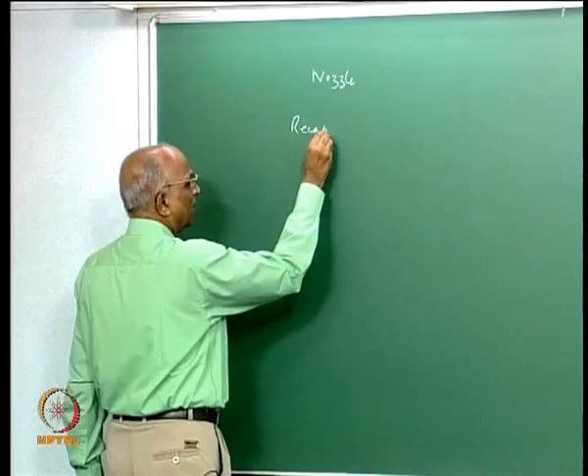Well, good morning. We will continue with the portion on nozzle. What we do today is we will find out what is the effect of area ratio. We will define area ratio. We will also find out how the nozzle operates at different altitudes and look at some typical results. But before doing that, let us quickly recap where we were so that we can connect it with what we are going to do today.

All what we told in the last class was a nozzle, if we need to have a high jet velocity, needs to have a convergent, maybe it should have a throat for which Mach number is equal to 1, and then I should have a divergent. We were very clear about the throat. We said it is the place where the velocity is sonic, that means the throat velocity is the sonic velocity, maybe Vt is equal to at.

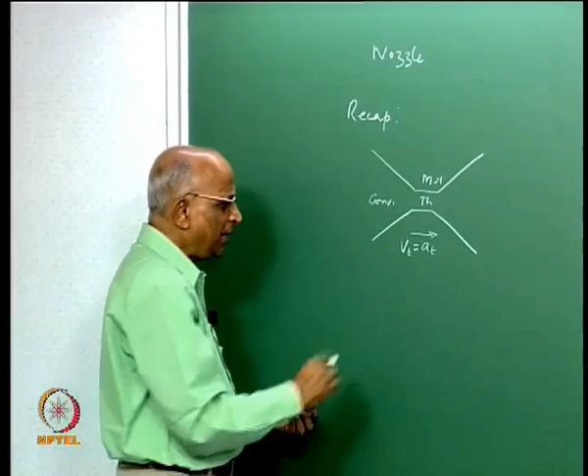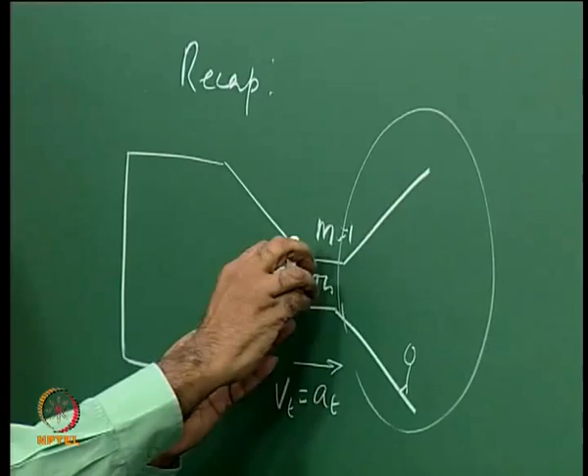We also told ourselves any disturbance here, suppose I stand on the nozzle here and make a loud noise, or I do any disturbance, this disturbance cannot enter the convergent and therefore the chamber over here. The reason being the velocity here is equal to the velocity of sound in the throat and is greater than the sound velocity in the divergent, and any disturbance which generates downstream cannot travel here because the speed here itself is sonic, and therefore we told ourselves any disturbance downstream of the throat cannot enter the chamber, and therefore the sonic throat essentially decouples the convergent and the chamber from the downstream portion. This is because the disturbances travel at the sound speed.

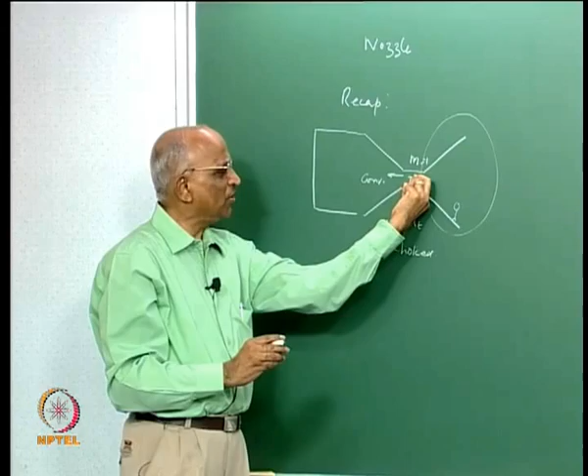Second thing, we also told that the throat is choked. In other words, we told ourselves that for the given mass flow rate I can have a maximum velocity which corresponds to sound speed at the throat, and if I have higher pressure or if I suck it at a lower pressure, I cannot exceed this condition. That means the throat always will have Mach number equal to 1, or the velocity here should be the sound speed. I think these definitions are important.

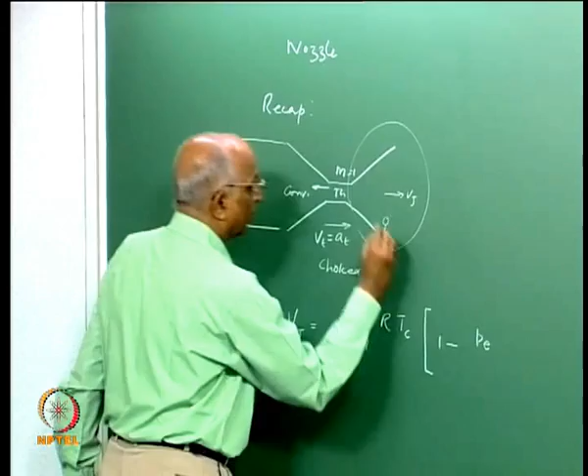We also derived an expression for the jet velocity at the exit, which we derived as Vj equal to the square root of 2 gamma divided by gamma minus 1. We will write in terms of the specific gas constant R into the temperature within this chamber into, we had something like the expansion, 1 minus the exit pressure, that is the pressure at the exit over here, divided by the chamber pressure here, Pe by Pc to the power gamma minus 1 by gamma, and this was under root.

And this we did not even consider the convergent divergent shape. We just said that if the chamber pressure is Pc, if the exit pressure is Pe, then you have the pressure ratio coming, this is the temperature in the chamber, and this is how we derived the expression for Vj, which was so many meters per second. Is it all right?

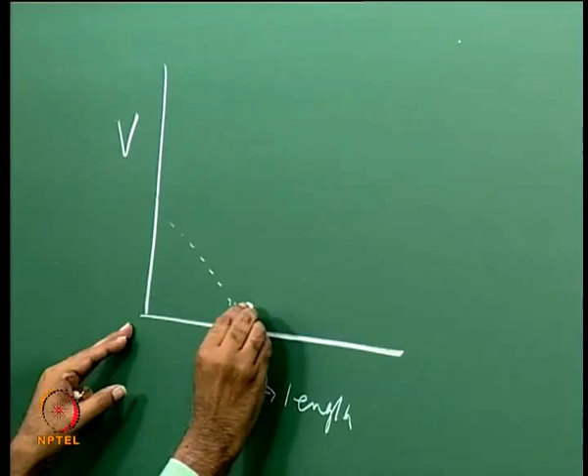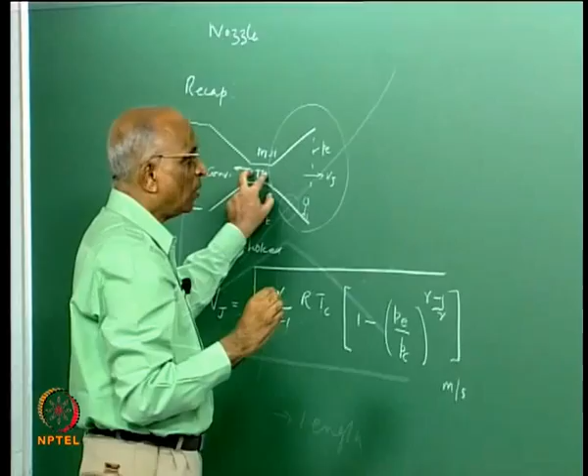And what we started with a vent, we derived this velocity, and then to look at the shape of the vent, it was necessary for us to have a convergent followed by the divergent, such that if I were to now plot the velocity of the gases as a function of the length of the nozzle, mind you, along the length of the nozzle initially I have a converging shape, then I have a throat, then I have the diverging shape. This is where I get the sonic velocity, and therefore the velocity will keep increasing along the nozzle. The moment I have at the throat the velocity less than sonic, the velocity builds up and thereafter the velocity falls. Therefore, the necessity to have Mach number 1 at the throat was essential, right? I think this we must remember all the time.

Having said that, now in today's class we will try to see, instead of mentioning that the exit pressure is Pe, after all I have to realize a nozzle. Can I put it in terms of a number? Let us say the area ratio at the exit will be Ae, and therefore what must be the area ratio Ae such that the nozzle will give me the required velocity. And that is what I want to do today.

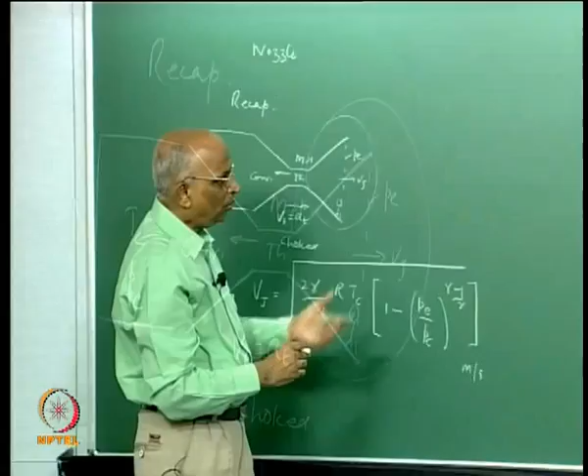Let me repeat again. See, when I realize a hardware, I do not know the value of Pe. All what I know is I must have a configuration like this, I must know a diameter over here, I must also have the diameter at the exit, or rather the exit area ratio. Therefore, it becomes essential for me to define something like area ratio of a nozzle.

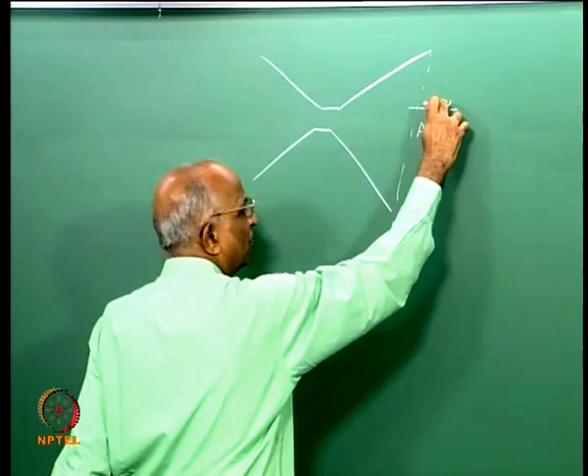To be able to give me the value of PE such that I can get the jet velocity, or rather, I want to know the configuration. Let us put it this way. I have a convergent, I have the throat, I have the divergent. I want to know what will be my exit area such that I can get the Vj whatever I want. I want to find out the expression for the jet velocity in terms of a diameter or an area ratio rather than put it in terms of the value of the pressure at the exit, which we called as PE.

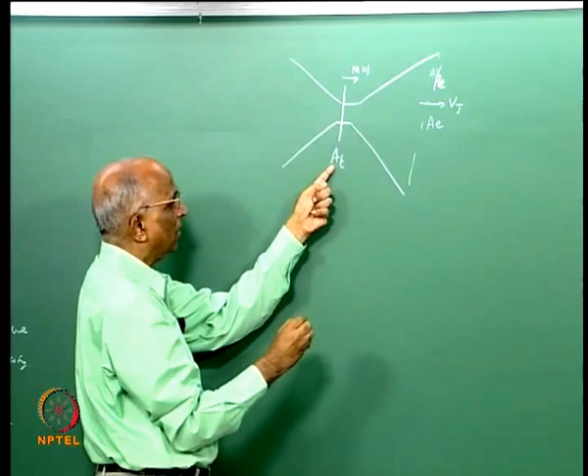To be able to do that, I am looking at the exit area, and I would like to define the area at the throat, because I know that at the throat the Mach number is always equal to 1. Therefore, I can define it as a critical or a particular area for reference, and I call the nozzle area ratio as equal to the exit area divided by the area at the throat.

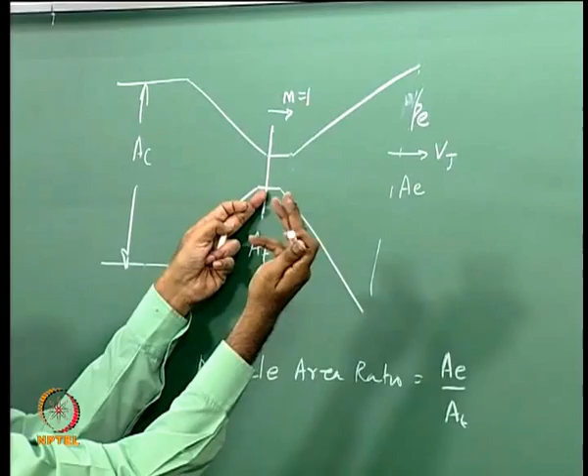This is by definition. In fact, initially all of us tend to think, if I have to define something like an area ratio, maybe I should think in terms of the area of the chamber over here and relate it to the area at the exit. But whatever be the area here, the reference is the throat, because that is where the velocity is always equal to the sound speed, or Mach number is 1. Therefore, we define the nozzle area ratio as the exit area divided by the throat area, and it is denoted by epsilon, and epsilon is equal to AE by AT. Is it okay?

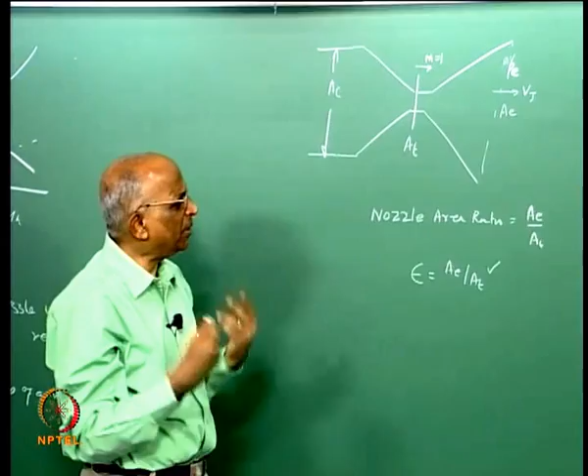Having said that area ratio is AE by AT, I want to derive an expression for how the area ratio will affect the jet velocity, or how the performance of a nozzle would be linked to the exit area ratio. Let me repeat the problem such that it becomes a little more clear. Supposing I have a small rocket, let us say, I bring it to the throat Mach number 1, I could have a small area ratio, or I could also have the same rocket in which, now I again draw this one over here, I could have a very large area ratio.

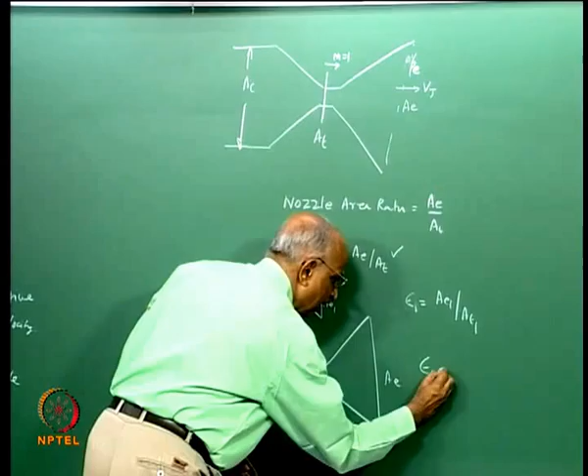And how do I compare the performance of an area ratio which is AE1 with area ratio AE2, if the throat area is the same in the two cases? In the first case, I have area ratio 1 equal to AE1 by AT1. In the second case, I have area ratio 2 equal to AE2 by AT2. I want to compare which one gives me a higher velocity. I want to compare these two nozzles, and therefore we define area ratio as exit area divided by the throat area. The reason being, I could have had a much larger chamber, but still even for a larger chamber the throat area would be the same for a given condition.

I think we must keep this in mind. Area ratio is always defined with respect to the throat, that is exit area divided by the throat area. I want to determine it. Let us go ahead and try to write an expression. Therefore, I am interested in finding the value of AE by AT for a nozzle. And how do I do it?

I just look at the continuity. I look at the mass which is coming over here, mass which is passing through the throat, mass which is passing through the exit, and I write m dot is equal to the mass which is passing through the throat, rho t into the velocity at the throat times the area at the throat, is equal to the area at the exit, rho at the exit, V at the exit. Is it all right? If anybody has a question, please, I think this is the time to take it up.

Therefore, we find that I need the condition at the throat, namely the rho t at the throat I need to be able to find out. I also need rho e. I know V, V is nothing but the velocity with which it is exiting. This will be equal to the Vj, which I have already derived. Therefore, I need to find the conditions at the throat. Therefore, let us first spend a couple of minutes on deriving the expression for the conditions at the throat, which are so critical to a nozzle. Let me again repeat, the condition at the throat will specify the mass flow rate because it is choked over here. I will come back to this later, but let us first find out what are the density, pressure and temperature at the throat.

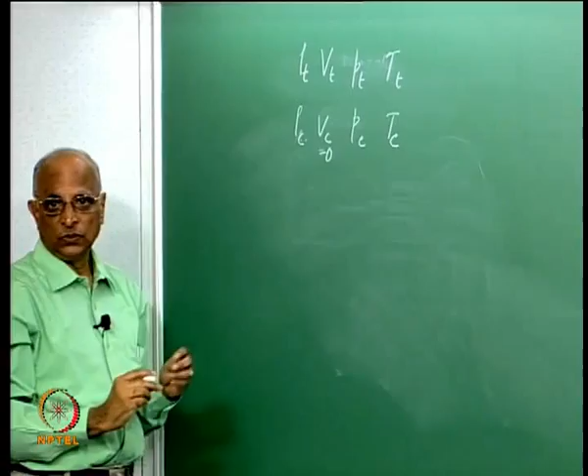We say the throat is defined by density at the throat rho t, Vt, pressure at the throat Pt, temperature at the throat Tt. That means subscript T denotes the throat condition. And how did we define the chamber conditions? Rho c, with capital C over here, velocity in the chamber which we said was equal to 0, pressure in the chamber, temperature in the chamber. At the exit, rho exit, V exit which is equal to the jet velocity at the exit, P at the exit, T at the exit. Well, these are the variables that we have.

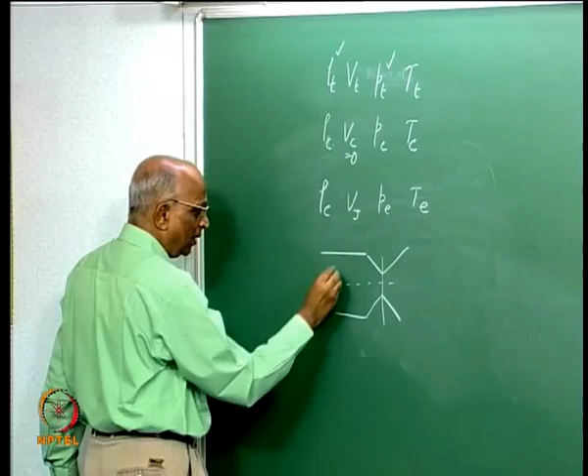I want us to find out the value of rho t as a function of rho c, Pt as a function of Pc, and Tt as a function of Tc. Therefore, we again look at the conditions; we are deriving the same expression, and we are interested in the condition at the throat over here. The conditions are given by subscript T for rho, V, T and all that. This is the chamber condition. We treat this as a control volume, or rather our attention is only in this small region which I show hatched over here.

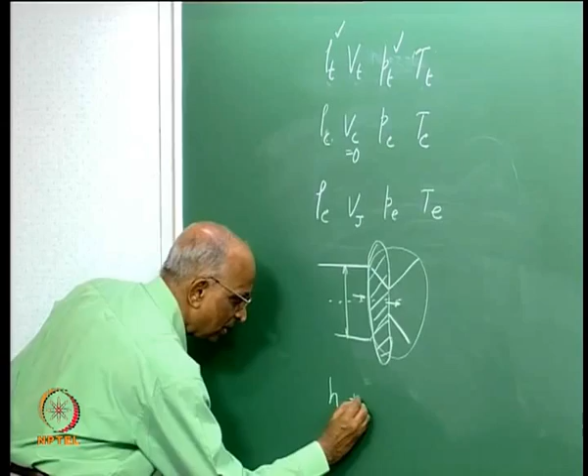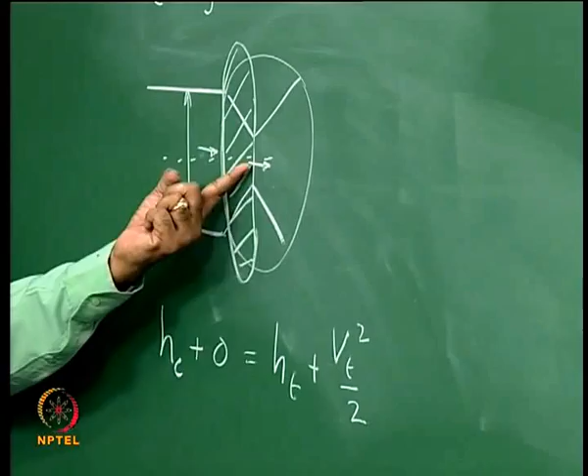Gas enters at a pressure Pc at velocity 0 at a temperature Tc. At the throat it leaves at a condition rho t at a velocity equal to the sound velocity because it is choked, at a pressure Pt and at a temperature Tt. So, let us write the expression for this control volume. Let us again assume adiabatic condition, and therefore we can write the enthalpy entering Hc plus kinetic energy 0 is equal to H at the throat plus Vt squared divided by 2. This is a steady flow energy equation, same mass flow; the initial kinetic energy is 0, at the throat the enthalpy is Ht, Vt is the velocity at the throat, and the kinetic energy at the throat is Vt squared by 2.

Okay. Now, let us simplify this equation. We get from this equation Vt squared divided by 2 is equal to Hc minus Ht, and the difference in enthalpy is equal to Cp times Tc minus Tt. Therefore, Tc minus Tt is equal to Vt squared divided by 2 Cp. Now, if there is anything, please let me know. What is the value of Cp in terms of gamma? Vt squared divided by 2 times gamma divided by gamma minus 1 into R.

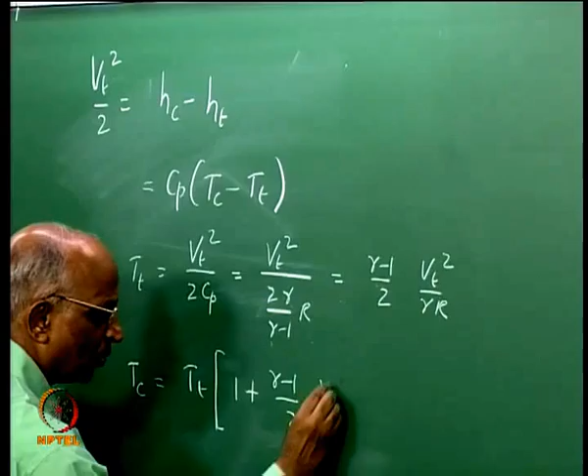How did this come? We have derived it in the earlier class. Cp minus Cv is R, Cp by Cv is gamma, and therefore Cp is equal to gamma by gamma minus 1 into R. Therefore, I can write this expression as gamma minus 1 divided by 2 into Vt squared divided by gamma R. And therefore, I can now write, taking Tt to the other side, Tc is equal to Tt into 1 plus gamma minus 1 divided by 2 into Vt squared divided by gamma R Tt. What did I do? I have taken Tt to the bottom, and therefore I have gamma minus 1 over 2 times Vt squared by gamma R Tt. Is there some 2 missing? No, it is all right.

And now I know gamma R Tt is the sound speed at the throat. Vt is also equal to the sound speed at the throat. Therefore, this is the Mach number squared, and I get 1 plus gamma minus 1 by 2 into Mach number squared. Mach number is 1, and therefore this gives me the temperature at the throat as a function of the chamber temperature. Tt by Tc is equal to 2 divided by gamma plus 1, taking it to the other side.

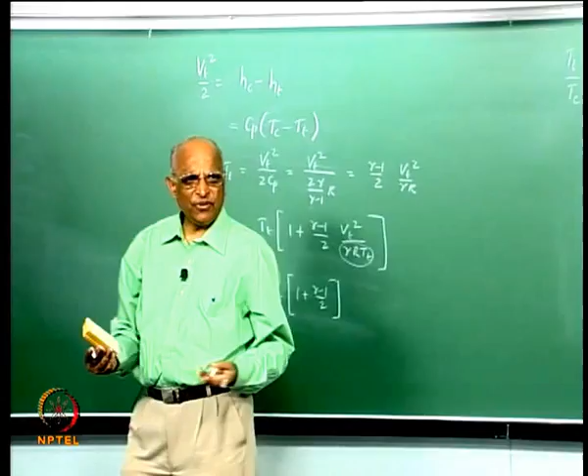Now, what will be the value of Pt by Pc? We have derived the expression in the last but one class. What did we say? It is equal to Tt by Tc to the power gamma by gamma minus 1.

Please look back, let's check it. And how did we get this? We had P by rho to the power gamma is a constant, P by rho T is a constant. Solving for this, we got this particular expression.

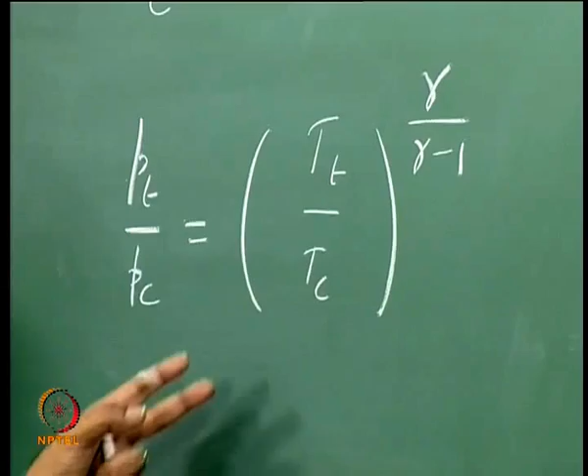In fact, you will remember in the expression for Vj, we had the expression 1 minus P by Pc to the power gamma minus 1 by gamma. How did it come? This was essentially Te by Tc, and when we converted it in terms of the pressure ratio. What is the value of rho T by rho C? 1 over gamma, that is equal to 2 over gamma plus 1 to the power 1 over gamma minus 1, and this maybe I should have written here as 2 over gamma plus 1 to the power gamma divided by gamma minus 1.

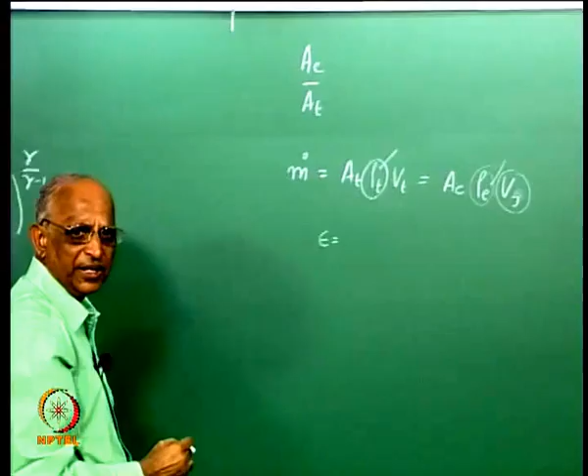What is it we have derived? We derived the conditions at the throat, namely the value of the temperature, pressure and density at the throat as a function of the conditions in the chamber, which is what we are given. I want us to go back and apply these three relations over here. We know the density at the throat, maybe I have to find out the density at the exit and find out the value of the exit area ratio as a function of the exit pressure, or exit pressure as a function of area ratio I am interested in.

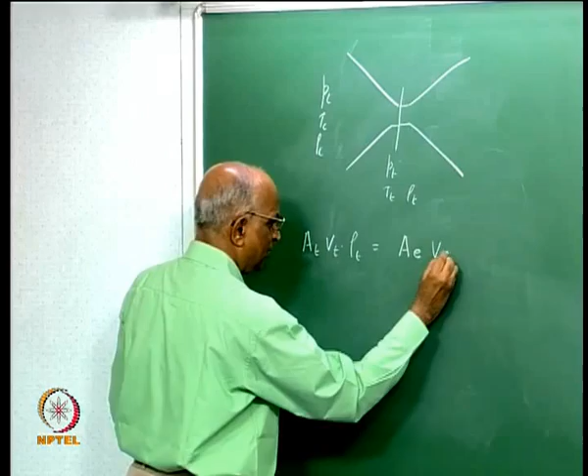Therefore, I hope by now we know how to evaluate the conditions at the throat of a nozzle. All we have learned so far is, if I have a throat coming from a chamber pressure Pc, temperature Tc, density rho c, I know how to find out the conditions of Pt, Tt and rho t. Agreed? Now, let us go back and solve that equation, namely area at the throat, velocity at the throat into the density at the throat is equal to area at the exit, velocity at the exit, rho at the exit, or rather from this I get the area ratio AE by AT is equal to Vt into rho t divided by Ve into rho e. Is it all right?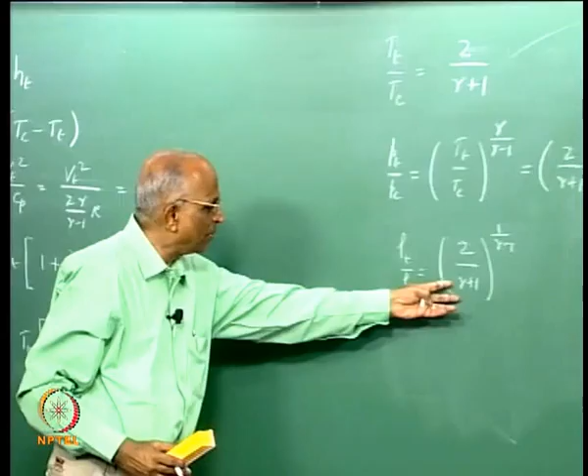I want to substitute the values. I know the value of rho t in terms of rho c, therefore I say this is equal to 2 over gamma plus 1 to the power 1 over gamma minus 1. I take this particular expression, rho t by rho c is equal to 2 over gamma plus 1 to the power 1 over gamma minus 1, and then I now have rho t into rho c into Vt, I still keep it as Vt, and now I know that Ve is equal to Vj. What is the value of Vj? Under root 2 gamma RTc over gamma minus 1 into 1 minus Pe by Pc to the power gamma minus 1 by gamma, into the value of rho e.

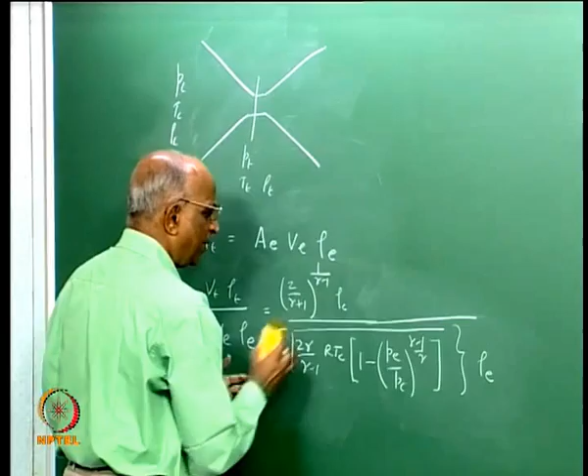Okay. Now I want to somehow get rid of rho e, also Vt. Vt I can write in terms of the sound speed, and this is equal to at, and therefore here I can write it as equal to under root gamma R temperature at the throat. Let's be very careful, because these are all simple algebraic expressions. We are substituting one into the other, and in the process we are also learning how the properties are varying. Let's solve that equation further.

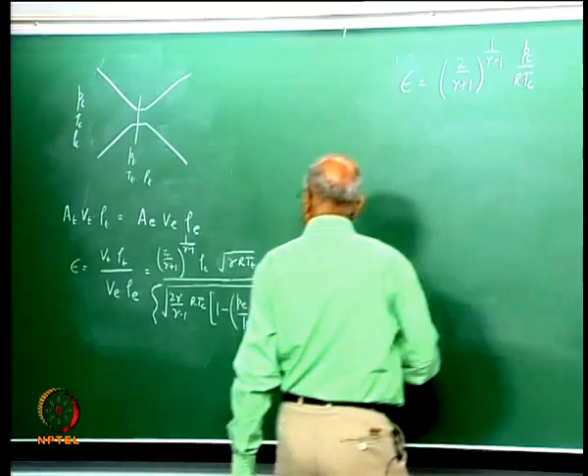Therefore, the area ratio epsilon is given by, let's write it down, 2 over gamma plus 1 to the power 1 over gamma minus 1 into rho c. Rho c I can write as Pc divided by RTc. P is equal to rho RT, P by rho is equal to RT, therefore rho is equal to P by RT. We have made use of the ideal gas equation, P is equal to rho RT, and therefore rho is equal to P by RT, Pc by RTc. And now I have another value gamma R. Now let's strike off some of the numbers here. Here I have under root gamma, under root gamma, under root R, under root R. Therefore now I get a value which in the denominator would be

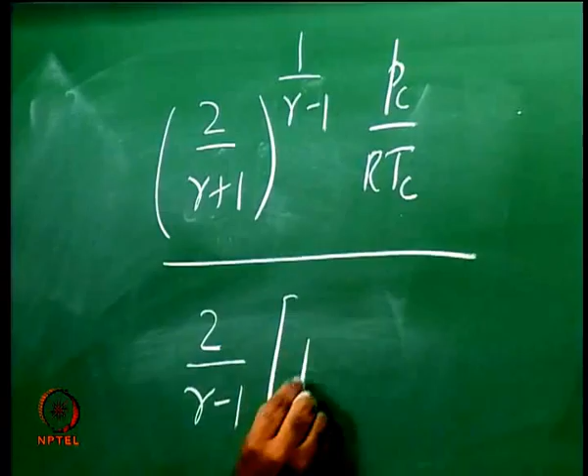we'll take Tc outside, 2 over gamma minus 1 into 1 minus Pe by Pc to the power gamma minus 1 by gamma under root. Now I have under root Tt here, I have under root Tc here.

Is it Tc? I am sorry. Is it okay? 2 over gamma plus 1, Pc by R Tc into under root Tt on top, gamma R get cancelled, therefore I had 2 by gamma minus 1 into this term Tc over there. I want to further simplify it.

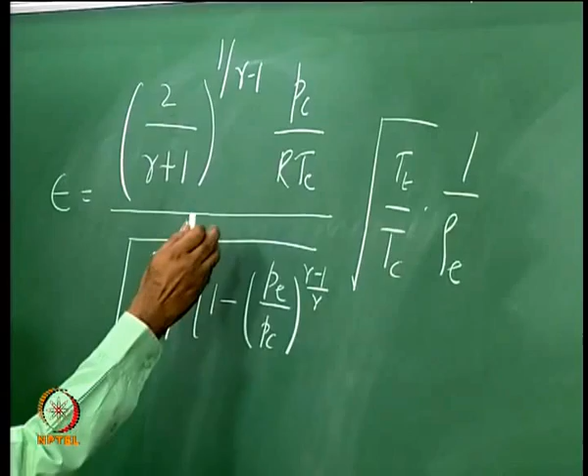We had derived an expression for area ratio as given by the above expression. We would like to simplify the expression by expressing it as a ratio of pressure, as a ratio of temperature, so that we can write it as a function of Pc and Pe alone. For this purpose, let us take a look at what we can write rho e as.

Maybe I can write the value of rho e in terms of the pressure at the exit. Pressure at the exit divided by rho e is equal to, PV is equal to R into Te. Therefore, pressure divided by density is equal to specific gas constant into the temperature at the exit. I simplify this expression to give me rho e as equal to Pe divided by R Te. Therefore, now I can substitute the value of rho e as Pe divided by R Te, so that now I get an expression for Pc by Pe.

This is one. Second is, I can also make some changes for the value of Tt, that is the temperature at the throat, and we had seen earlier that the temperature at the throat divided by the temperature at the chamber, at the throat the Mach number is unity, and therefore this is equal to 1 plus gamma minus 1 by 2 into 1 square, or this is equal to gamma plus 1 divided by 2. Well, there is some problem here. The temperature at the throat reduces with respect to the chamber stagnation. Therefore, this expression should really have been Tc, that is the temperature in the chamber, divided by the temperature at the throat. Therefore, now I can write the temperature at the throat is equal to 2 over gamma plus 1 into the temperature of the chamber.

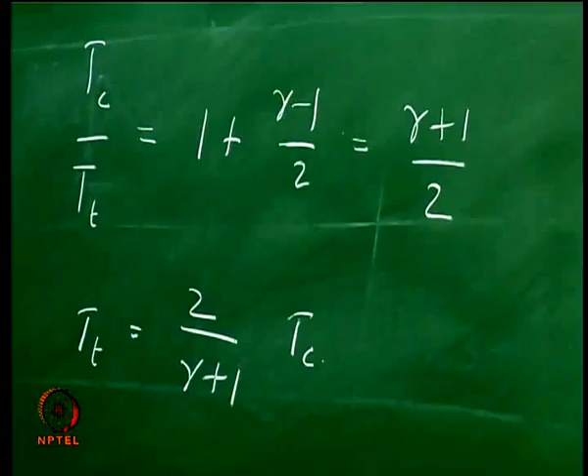Now, these two things, namely the value of temperature at the throat in terms of the chamber temperature and the exit gas density in terms of Pe by R Te, I substitute in this particular expression, and now we therefore get the area ratio epsilon as equal to 2 over gamma plus 1 to the power 1 over gamma minus 1, and now Pc divided by R Tc, and now I get the value of Tt divided by Tc. I write it as 1 over under root Tc, which is over here. Under root Tt I can write as 2 over gamma plus 1 to the power half into under root Tc. This is where I have written this, and 1 over rho e,

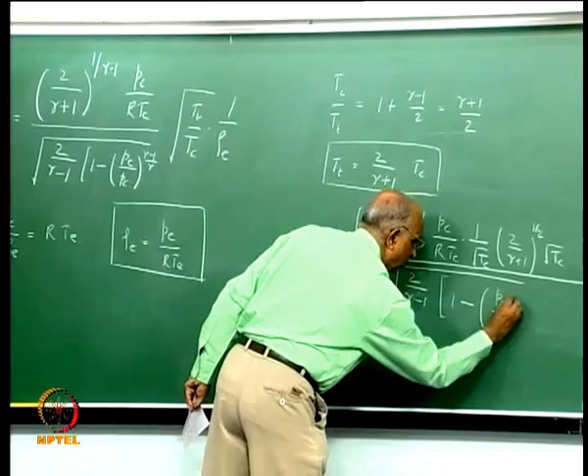and 1 over rho e is equal to R Te by Pe, and this is divided by the same value that I had here, namely 2 over gamma plus 1, gamma minus 1, I am sorry, into 1 minus Pe by Pc to the power gamma minus 1 by gamma, close bracket over here. Here also the bracket should have been closed here.

Now let's simplify this. You find that under root Tc cancels, and now if I were to put it in terms of Te by Tc, in terms of Pc by Pe, I will get an expression which gives me epsilon, or the area ratio, is equal to 2 over gamma plus 1 to the power 1 over gamma minus 1. Now I have Pc here, I have Pe here, let us write it as Pc by Pe, and now R also cancels over here, therefore now Te is left over here, that is the exit temperature, and there is nothing else here. Let's write that down. I have the value of Te over here, and I have taken Pe inside, and here I have Tc over here, and this divided by,

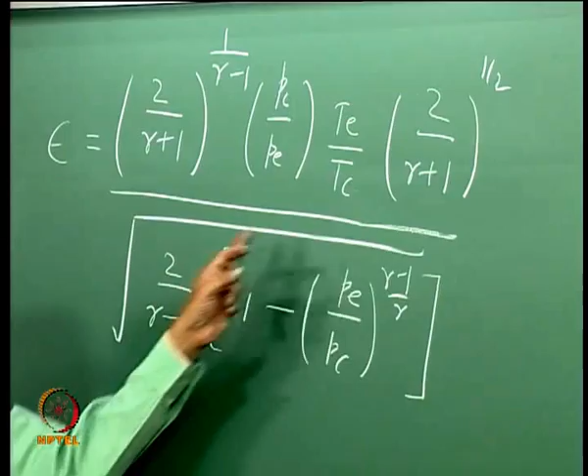of course I need to take 2 over gamma plus 1, 1 over gamma minus 1, and this I take 2 over gamma plus 1 to the power half into under root of the same denominator which comes over here, 2 over gamma minus 1 into 1 minus Pe by Pc to the power gamma minus 1 by gamma and close bracket here. Now, immediately I see that 2 over gamma plus 1, 2 and 2 get cancelled over here, gamma plus 1 comes on top, and therefore, now I can write the denominator as equal to gamma plus 1 divided by gamma minus 1 into 1 minus Pe by Pc to the power gamma minus 1 by gamma close bracket over here.

And now let's simplify the numerator. I get 2 over gamma plus 1 to the power 1 over gamma minus 1. And now, can I express these things together? Can I express Te by Tc in terms of Pc by Pe? See, we have been doing this.

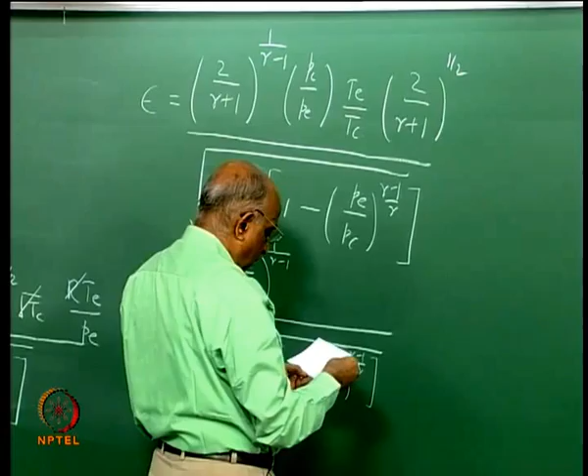We always said Te by Tc, using the isentropic expansion, we can always write it as Te divided by Tc is equal to Pe divided by Pc to the power gamma minus 1 by gamma. You will recall we have done this several times. Therefore, if now I say Pc by Pe and I add this together, I will get an expression in terms of Pc by Pe, and now I have Te by Tc.

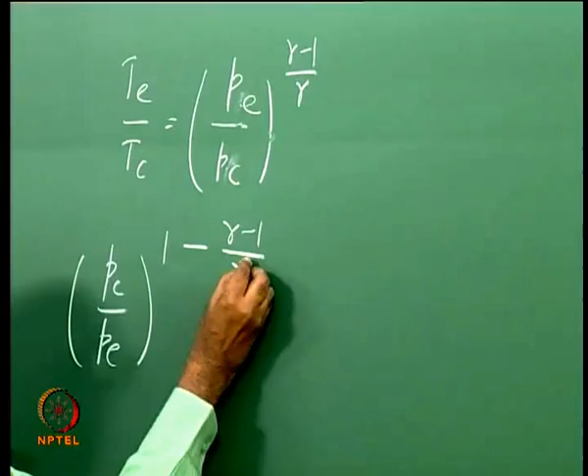Te by Tc should go as Pe, mind you, in the same order, Pe by Pc, and therefore I will get Pc by Pe into the value of 1 minus gamma minus 1 divided by gamma, which is equal to Pc by Pe to the power 1 over gamma, because 1 minus 1 plus 1 over gamma becomes 1 over gamma. Therefore my net expression now becomes 2 over gamma plus 1 to the power 1 over gamma minus 1, Pc by Pe to the power 1 over gamma, divided by gamma plus 1 divided by gamma minus 1, into 1 minus Pe by Pc to the power gamma minus 1.

What does this expression tell us? This expression tells us that the area ratio of a nozzle can be given by this particular expression, and as the chamber pressure increases, the area ratio increases, or rather as the ratio of Pc by Pe increases, the area ratio increases, which can come about either by increasing the chamber pressure or by decreasing the exit pressure. If I have a very low value of exit pressure, my pressure ratio is larger and I require a larger area ratio nozzle. Of course, gamma also plays a role, but a secondary role, but the main aspect of area ratio comes from the variations in the value of the chamber pressure to the exit pressure.

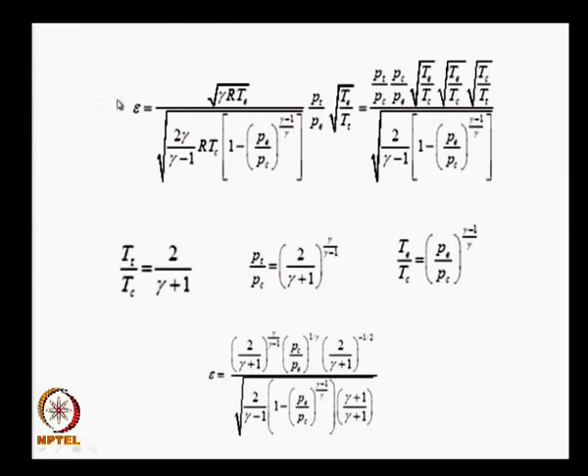Let us take a look at some of the values which I have plotted in the slides over here. See, I quickly run through whatever is given here. Area ratio is defined by the value of Ae by At, and this is the expression we had got. We had the jet velocity Ve given by the square root of 2 gamma by gamma minus 1, R Tc, 1 minus Pe by Pc to the power gamma minus 1 by gamma, and thereafter we wrote the area ratio in terms of these parameters and got this particular value, which worked out to be 2 over gamma plus 1 to the power 1 over gamma minus 1, Pc by Pe to the power 1 over gamma. We should have had gamma, yeah, I think we have swallowed 1 over gamma plus 1 somewhere.

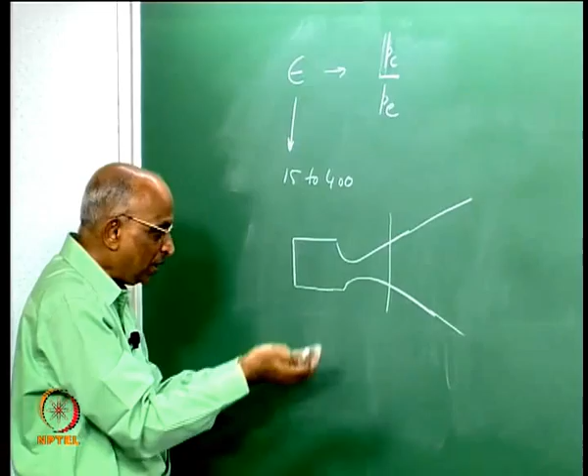I cannot have infinity because I cannot afford to have a rocket motor which gives me a very large value. I cannot keep on extending because the mass of my rocket will keep on increasing. Therefore, the general practice is to have area ratios between 15 and 400, 15 for those rockets which operate within the atmosphere or near to the earth, and 400 or values around this for rockets which operate in the vacuum regions. Therefore, the question which now comes is, supposing I have a rocket nozzle, let's have some clarity on what I propose to do now.

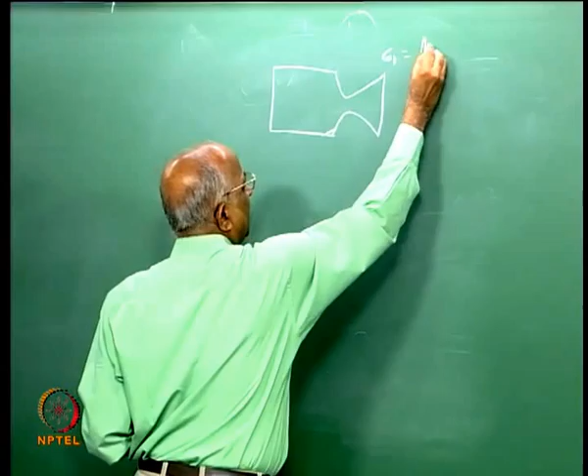Suppose I have a rocket nozzle which, let us say, has a small value of AE by AT. This is the value, I say epsilon 1, which is equal to AE1 divided by AT1. For the same condition of the throat, I also have another rocket which has a larger area ratio, let us say AE2 for the same value of AT1. That means I have epsilon 2 is equal to AE2 divided by AT1.

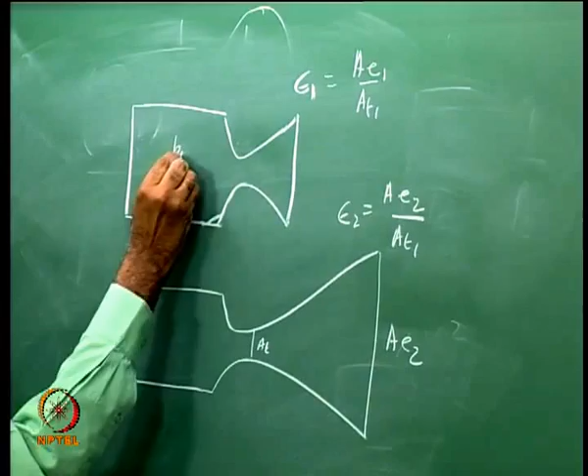Now, what I want to describe is, suppose the chamber pressure is the same in both the cases. What I am going to get here is a smaller value of Pe2, and here I get Pe1, or rather the value of Pe1 will be greater than Pe2, right. I have a smaller nozzle, it expands to a higher value of pressure, I expand it still further, therefore, the value of Pe2 is less than Pe1.

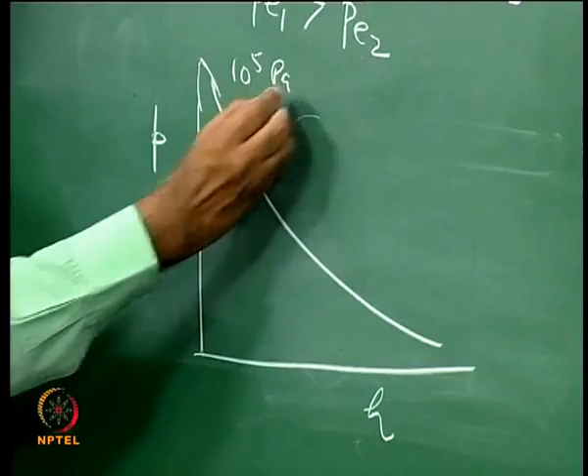Now, if we have rockets of different area ratios, and we also know, maybe I plot the value of pressure as a function of altitude. Pressure keeps decreasing as altitude increases. At ground level, I have a pressure of, let us say, 1 atmosphere or 10 to the power 5 Pascal. As I keep increasing in altitude, it decreases till the time we leave the atmosphere, let us say around 40 or 50 kilometers. The pressure has gone down to a very small value, and when I go to geosynchronous altitudes, it is almost perfect vacuum. Therefore, the ambient pressure also plays a role.

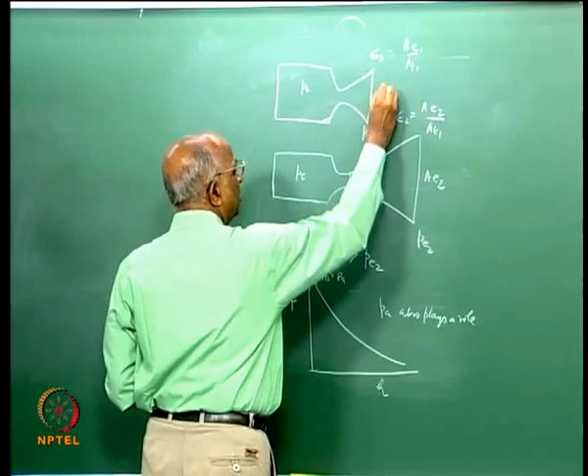Let us assume that in this case the ambient pressure is PA over here, the same ambient pressure is over here. Therefore, let me plot it a little on a plot now. All what I am trying to do is, I am trying to plot the pressure variation along the nozzle. In the first case, it starts with a value of Pc, comes down to a value of Pe1. In the second case, the same chamber pressure, this is Pc, this is the start of the nozzle, and it continues further till I get a much lower value of, let us say, Pe2 over here.

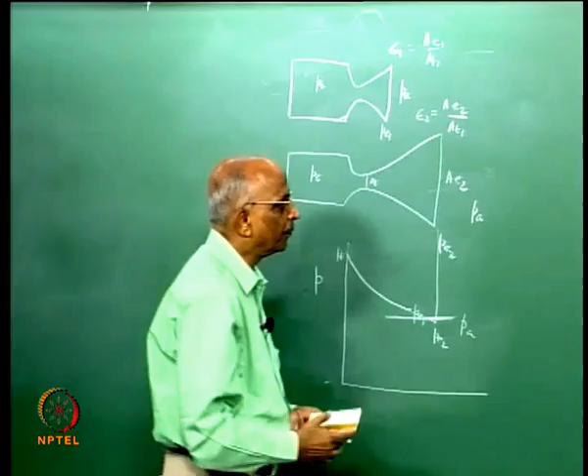Now, supposing I consider a situation wherein the ambient pressure is somewhere over here. Let me replot this. What I am trying to tell you is the pressure is varying along the distance along the nozzle, and this is the ambient value of pressure Pa. In the first case the rocket nozzle is small, it comes over here. In the second case the rocket nozzle is bigger and therefore maybe I expand it out still further, it comes over here. The first case is PE1, the second case is PE2.

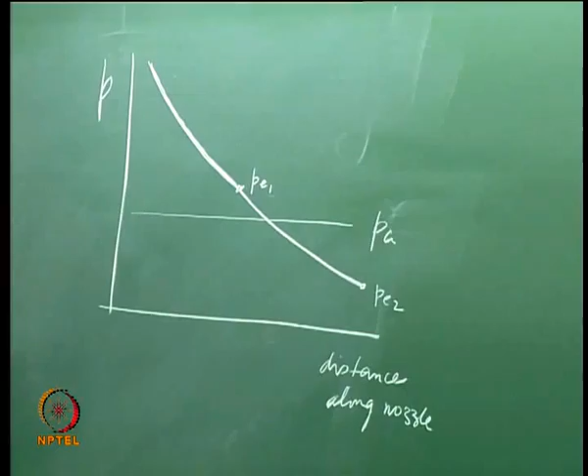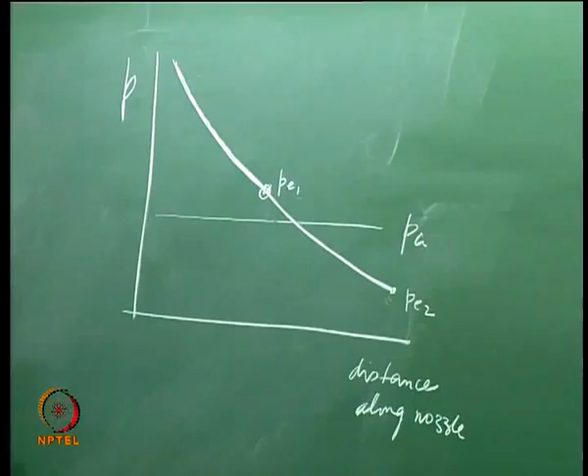Therefore in the first case what is going to happen? The pressure at the exit is greater than the ambient pressure. In the second case the pressure at the exit, that is PE2, is less than the ambient pressure, and this is what this graph tells you. Pressure at the exit for the first nozzle, which is small, is higher than the ambient pressure. Pressure at the exit is less than Pa. Therefore what is it I have done in the first case? The expansion is not completed. Therefore I call this nozzle an under expanded nozzle. In the second case I expand it over and above the ambient pressure, therefore I call this particular nozzle an over expanded nozzle.

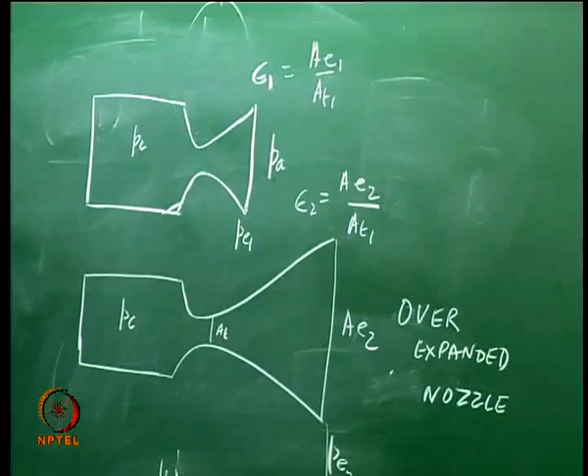Right? Are there any defects in this? What have I done when the nozzle is small, the expansion is less? What happens? I am not able to get a high jet velocity because my exit pressure has still not been able to match the ambient value. That means I could have got much more had I really expanded it a little bit more, come over here, or rather it would have been good for me had I expanded the nozzle something like here till that time the pressure matched over here.

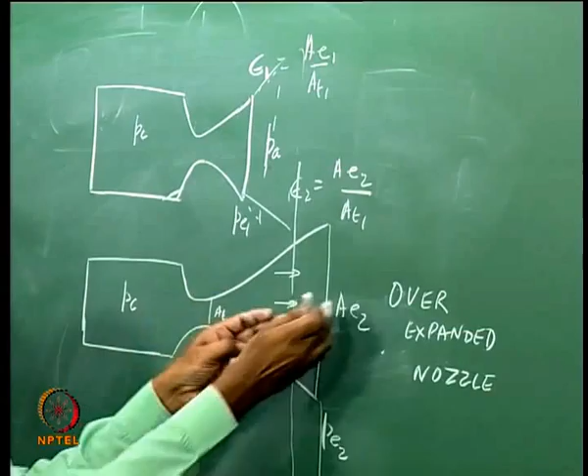What is the problem with an over expanded nozzle? Well, the pressure here itself is equal to the ambient pressure. The ambient pressure is now higher, that means the pressure is going to increase, and that is just not possible. Mind you, the flow here is supersonic, it does not know the conditions existing over here. All of a sudden the supersonic flow finds a higher pressure because it has already been expanded to a lower pressure, and therefore it is necessary that something like a shock stands over here. That means I have supersonic flow, it is not able to see anything before it, but all of a sudden when the flow reaches it sees a higher pressure, and therefore something like a shock is required to match the exit pressure.

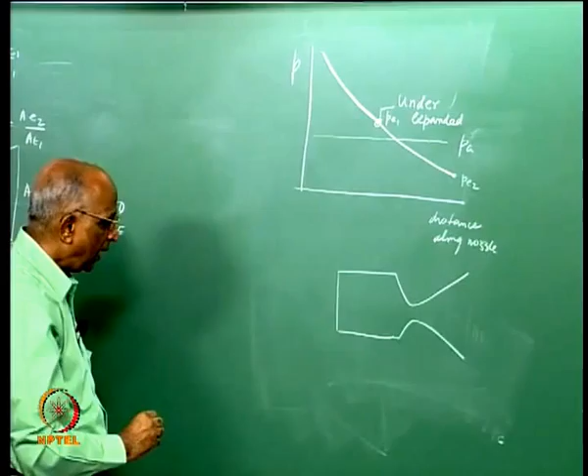And what would happen? Let us plot it now. What is going to happen? I have something like this, I have a nozzle here, and now the pressure has come to the ambient over here, and therefore if I were to plot, the pressure is going to decrease. I should have a shock wave, and the flow downstream of the shock wave is subsonic, and therefore it will take me back to the ambient pressure.

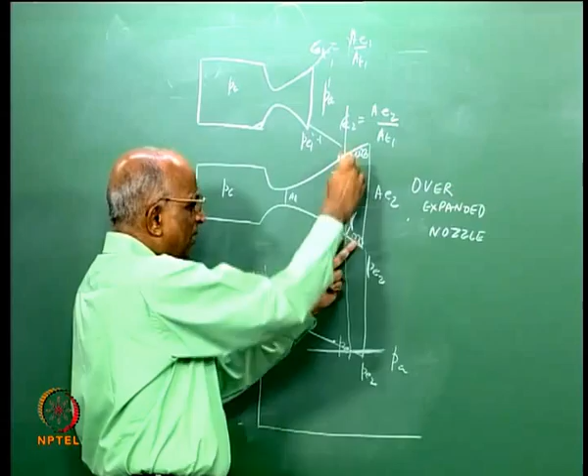That means there is going to be a shock, and with shock the flow is going to separate out. If it is going to separate out, I have a region of higher pressure, and since I have higher pressure here, the performance of this nozzle may be even better had flow not separated. But normally this flow separation never happens symmetrically, and it leads to something like side forces, and therefore over expansion is not preferred at all. I will get back to this point. This point will not be clear at this point in time.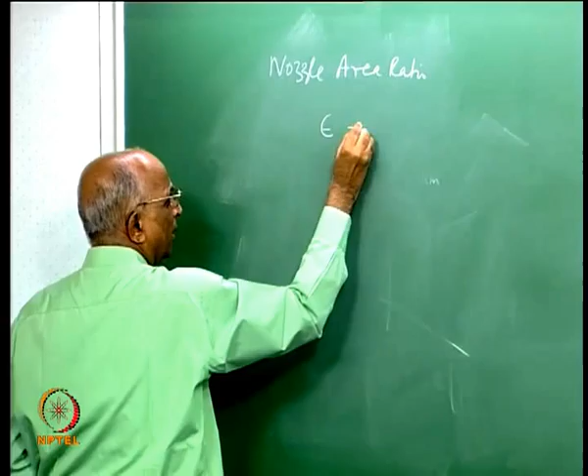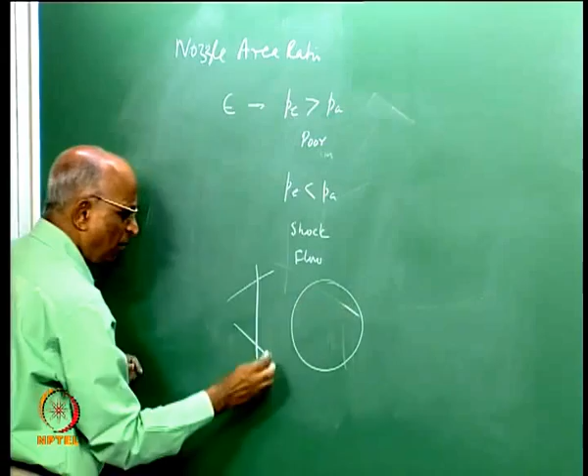All what I am trying to say is, if my nozzle area ratio epsilon is not properly tailored and I get PE which is greater than PA, I have an under expanded nozzle, in which case my nozzle performance is poor, I do not get the high value of Vj. But in case my PE is less than PA, I will have something like a shock, a flow separation taking place in the nozzle. If I consider a section of the nozzle, somewhere over here flow separation is taking place. Flow separation does not take place uniformly, with the result that at some place I have higher pressure where flow separation takes place, and somewhere flow is not separating, low pressure. Therefore high pressure will give me higher force, and the rocket in that case will see something like a side force because of the higher pressure on the nozzle, and this is again not desirable.

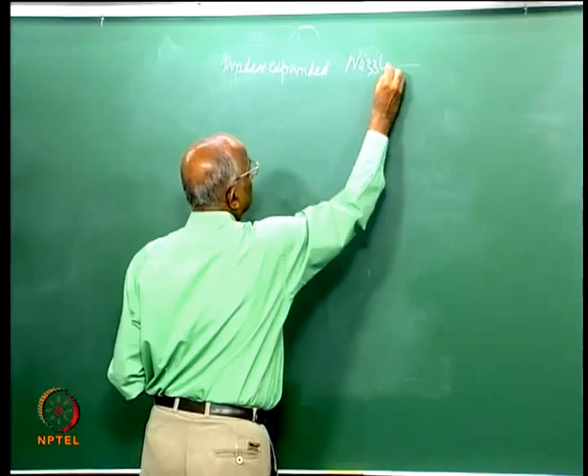We will come back to this, but after seeing a few pictures on flow separation in nozzles, what do we really mean? Let us go back and ask ourselves, can I make a plot of flow separation, or let us say an under expanded nozzle? How does the flow take place? Let us consider this diagram: a chamber, a nozzle, and now what is it we are telling? This is the center line. We tell ourselves for the under expanded nozzle PE is greater than PA. Therefore, when the flow comes here, it meets a lower pressure. Therefore, the flow is going to expand out like this.

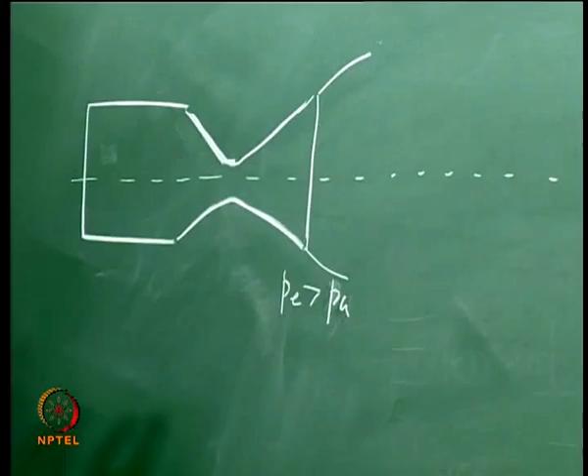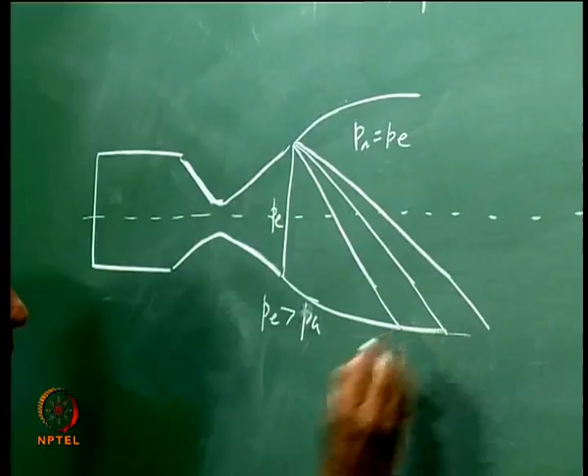And how does the flow expand out? I have rarefaction fans which are generated, Prandtl-Meyer expansion at a point, and similarly over here. That means the plume comes here, this is the low pressure region, this is the higher value of pressure, and when the flow expands out, I have here the back pressure, which is the ambient pressure, equal to PE. These are the expansion waves coming over here. Similarly over here on the other side, I have the same expansion fans. Why do we need these things? Because at the center the flow velocity is still higher. Therefore, what is happening here? The pressure has been matched, but here I have expansion. Therefore, here the flow pressure is going to be less than the value of PA.

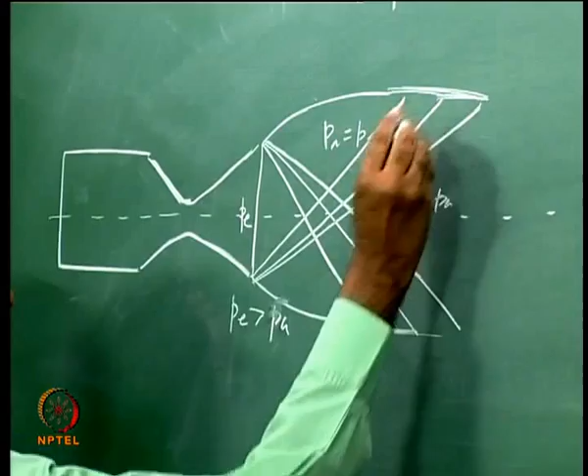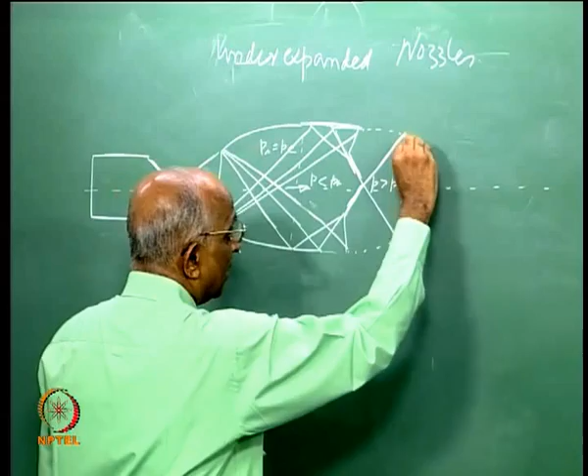And when this rarefaction fan touches the boundary of the plume, you get compression waves coming like this, and they form a compression wave like this. Similarly, I get all these forming compression waves and a net compression wave coming over here. I have a compression region over here, and because of compression, my pressure becomes greater than the ambient pressure. But on the outside, the effect of this is to still give me the same value, and these compression waves travel still forward. This is the boundary of the plume, and when a compression wave or an oblique wave strikes an interface, I start generating a rarefaction fan again. Over here it strikes, I start generating these rarefaction fans again, and then this comes and strikes here. I again get an oblique shock wave. This strikes the plume over here. I again get an oblique shock wave, and this type of thing continues.

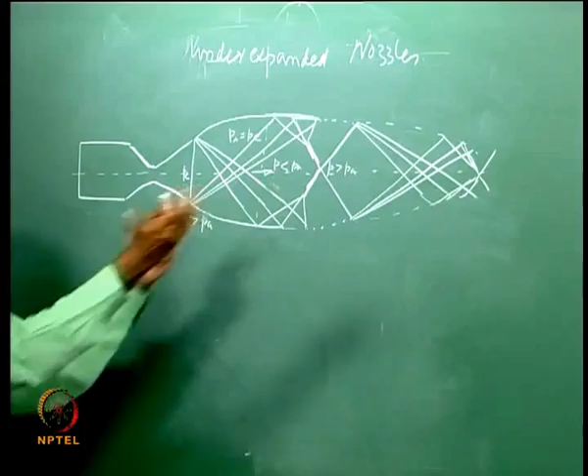In other words, I have something like an expansion fan, a region of low pressure, then I have oblique shock waves, and these oblique shock waves give me higher pressure. Again I have a smaller region, and again a high pressure region, and this continues. In other words, I have regions wherein pressure is higher, and whenever pressure is higher, the temperature is higher.

If temperature is higher, the flame becomes more luminous. When temperature is higher, you can see something because it becomes more luminous. We find that because of under expansion, there is further sudden expansion. That means there is an expansion fan, and this expansion fan impinges on the plume surface, and when the expansion

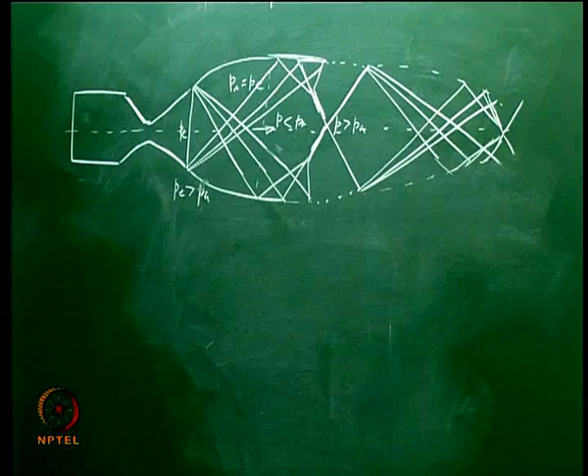fan impinges on the plume surface, the expansion is reflected as a compression, that means as weak oblique shocks. These oblique shocks further compress the medium. The interaction of the compression waves with the plume surface forms expansion waves, and the process of compression and expansion continues. If I have an overexpanded case,

and let us just put that down also such that we understand the wave pattern. It is a little bigger nozzle. Now I have PE which is less than PA. What is going to happen? Much earlier

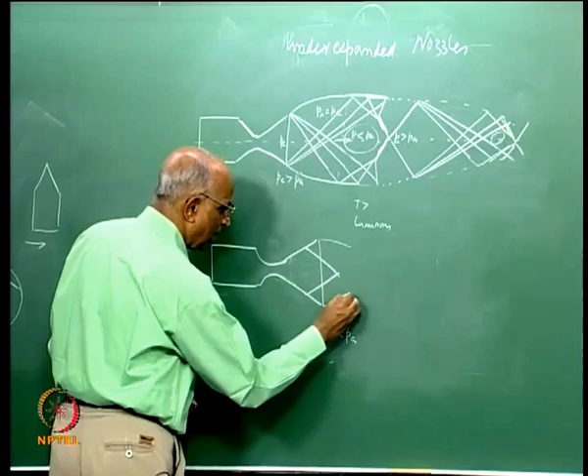I am going to get a shock which is going to make the pressure over here higher, because supersonic flow, I need a shock which will match the higher value of pressure. Therefore, what is going to happen is the boundary will come down like this. I have a shock wave, it interacts with the boundary, and what happens is when it interacts with the boundary I get expansion fans being thrown off and the plume expands over here, and similarly over here let us plot the center line again.

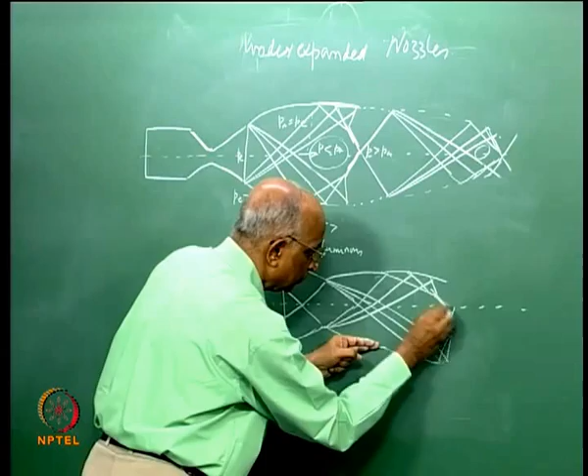It is thrown off over here, thrown off here, thrown off here, this continues over here. These again, the rarefaction fan interacting with the boundary forms an oblique shock. Similarly over here they form something like an oblique shock over here. And then this oblique shock interacts with the boundary here. Again you have rarefaction fans and the process continues.

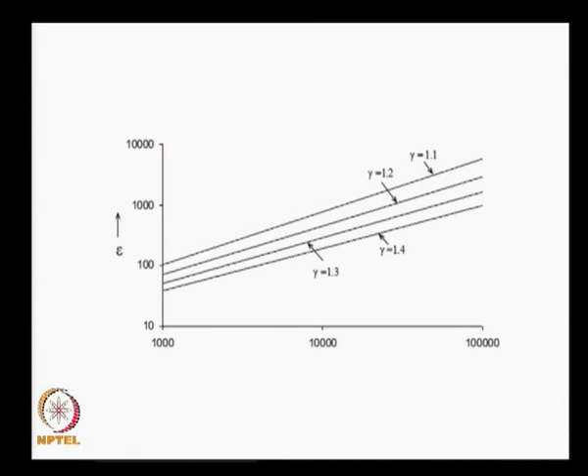In other words, in one case I get a higher pressure region a little bit away from the nozzle exit, in the other case I get a high pressure region just at the nozzle exit. That means over here I get a high pressure region because I have oblique shock waves which create a higher pressure region, and I get a wave pattern something like this. To be able to appreciate this point, I just took some pictures of some of the nozzles, and this will become clear to you now.

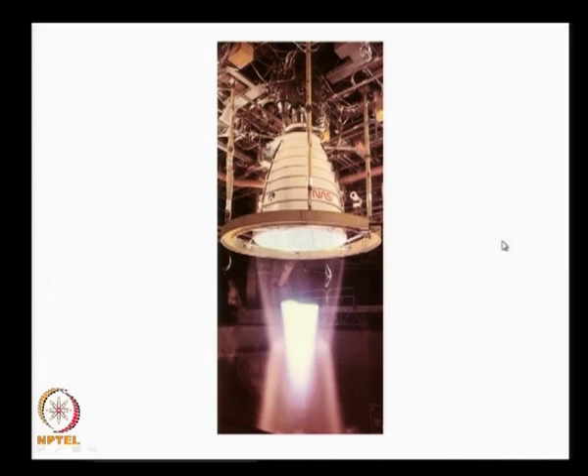This is a test of an engine, and here you find there is a shock here and something like this. This is because the exit condition is either under expanded or over expanded. We will continue with this in the next class.